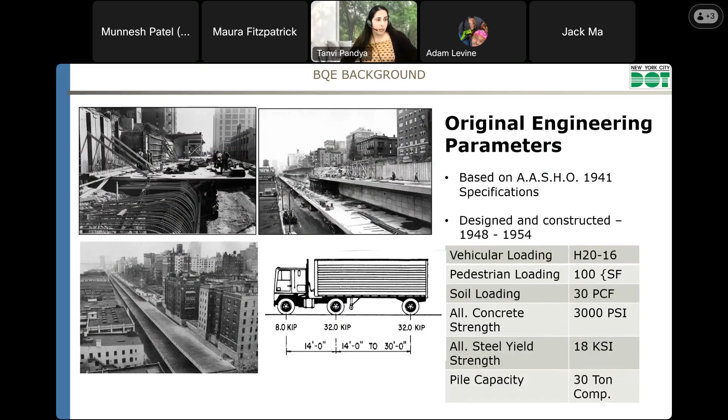We, the city DOT, took on this project in the 2013, 14 time frame. My personal involvement began in 2016 when I came to the city DOT to figure out what to do with this structure and where to take it into the future. And obviously, the first thing we wanted to do is really understand the condition of the structure.

So we did in-depth inspections, had load ratings done at the time. We did a lot of non-destructive testing to understand the condition of the structure. And that has kind of continued over the years, a variety of different tests occurring at different times. But typical engineering effort tends to be focused towards the capacity side of the equation, right?

So to understand how long a structure can be kept in service, there's two parameters. What is the demand on the structure and what is the capacity of the structure? And you always want the demand to be less than the capacity, right? So the capacity is a pretty typical analysis that we do quite frequently. On the demand side, though, information can often be a little bit dependent on code rather than reality, right?

So there are AASHTO codes that we follow that tell us what analysis to do and so on. AASHTO had done analysis of trucks at a certain point in time, and that told them what truck weights to use in design. But there's another assumption made in that equation, which is there is enforcement of truck weight limits happening on the roadways so that that assumed truck capacity is not being exceeded. But we don't know that.

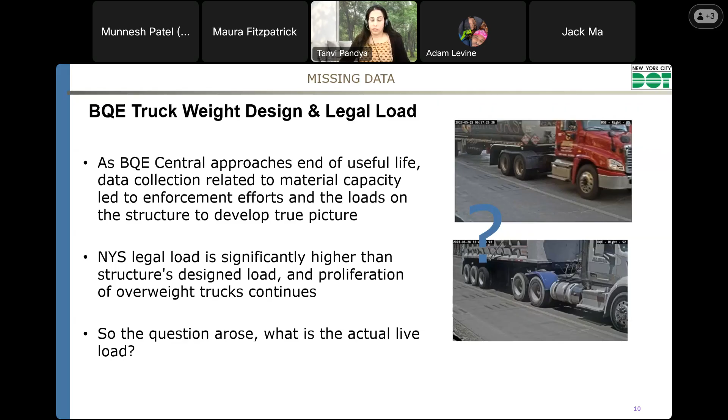We know from anecdotal information that the Northeast tends to have a lot of overweight vehicles. We also know that it's really, really difficult to enforce truck weights when you are on a very narrow roadway. So that led us to a question of what is the actual load on this structure? We cannot just assume that we are safe as long as we follow the codes. We wanted to be more proactive than that.

So during this time, we were working closely with C2SMART and Professor Hani Nassif in particular with the mayor's expert panel. And he had a grant to test various WIM sensors and analyze which sensors have a long service life and whatnot. So we created a test bed for him on the BQE so we could collect data on our site and get an understanding of the loads on our roadway. So all 6 lanes had sensors in it, and that was in 2019 that we installed this system.

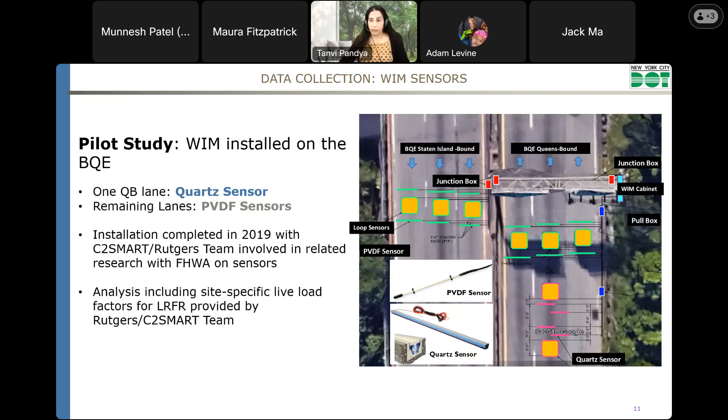What that told us was very much along the lines of what we anticipated, right? So there's 130,000 vehicles, and about 12 to 13,000 of those per day are trucks. Out of that, about 10 to 12% are overweight.

If you look at that bar of overweight and further look at how many of them are just a little bit overweight and how many are really overweight, this is the breakdown we were getting: about 40% were in that range of 80 to 85,000 pounds, which for structural purposes is not a big deal. That much safety factor we have. But then the remaining overweights, over 90,000, that's this gray, yellow range. We're talking about 20% of those overweights were severely overweight.

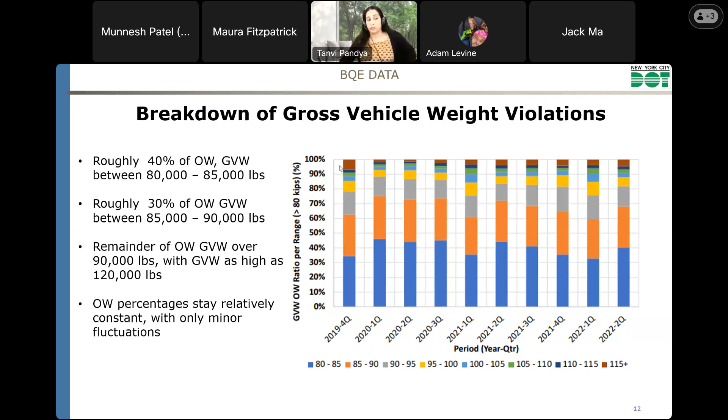That really piqued our attention. And the reason that matters is there's such a thing as load rating and load factors, right? So when we're trying to simplify this understanding of what is the capacity of the structure, how long can we continue to carry the current traffic, we do what's called a load rating. In that load rating, there have to be some factors of safety we apply to the capacity side as well as the demand side. So by code, that demand side is supposed to be 1.75 for inventory operating.

This kind of gets technical, but there are these factors. But the code also says that if you know the actual traffic conditions on your roadway, then you can take that into account and calculate what your site-specific load factor should be. So using the data that we had collected from that test bed, we had Professor Hani and his team calculate the site-specific load factors for us.

And in that site-specific load factor calculation, those extreme overweights really play a big role. And so because we had such a high number of high overweights, that changed our number. So we couldn't rely on a 1.75 number. We had to go to 2.13. That's over 20% increase that we had to account for in the Staten Island bound direction and over 30% for the Queens bound. That's a pretty significant difference.

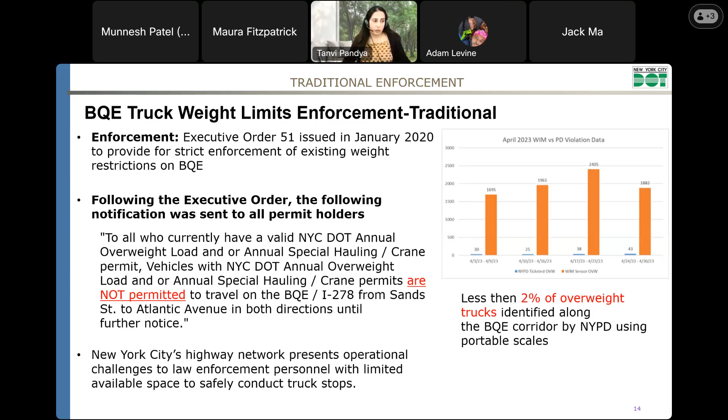But if you think about the roadway, it's 11-foot lanes, no shoulders. So they would have to take them off the roadway to a flat spot and then use portable scales. So even when we were proactively identifying overweight trucks for them, it would take them up to 2 hours to test one truck. So while the system was calling out these orange bars that you see, a much bigger number of overweights, PD was only able to handle a few trucks at a time. So logistics did not allow real enforcement to occur on this site. So that gave us additional impetus to make the case for direct enforcement using WIM.

By this point, obviously, the system had been out there for a while. We'd tested it over and over, so we had a sense of how the accuracy was staying over time and what band we're in with the error. So we felt somewhat comfortable saying that we can achieve this 10% number comfortably. At that point, again, we had a lot of attention from electeds at the time. So we were able to get legislative support to get this legislation done.

This is a first of its kind in the US, where we said we can use WIM to directly enforce the legal weight limits, if you are 10% over the limit based on your bridge formula, which admittedly has been a little bit difficult to get across to all of the freight industry, because trucks are used to that 80,000 pounds number, instead of recognizing that if you have a smaller truck, you don't get 80,000, you might get 54 or some other number, and then also the axle and tandem weight.

And the legislation requires us to have 2 independent weights taken. So we have 2 systems that measure each vehicle. That was passed in 2021, and then in '23 we made some minor adjustments to it. Once the legislation passed in 2021, by October 2022, we had finished the installation of the first system. This is just a graphic to show how the system is organized. We in the city already do automated camera-based enforcement, so we had pretty good background on that end of things.

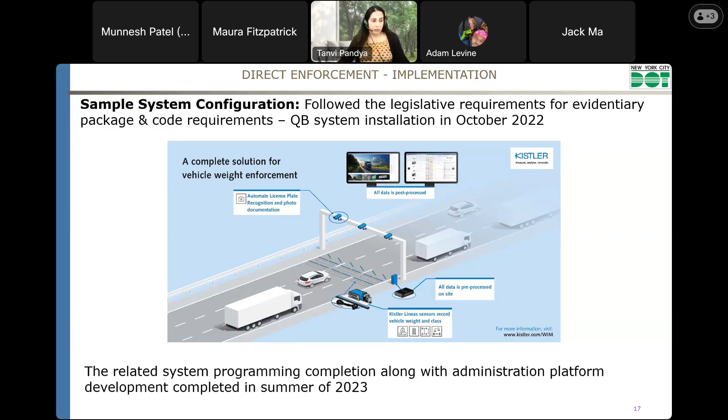So the WIM side had to come in. We had C2SMART supporting us in some of that effort as well. And then while the construction was going on, we had our back end being built out by our in-house IT so that we could actually identify the violations, do the reviews, and process it.

So why is this a big thing? Because if we were already doing camera-based and WIM has been around forever, what's the big deal? The big deal was tying all of this together, not just for enforcement. And while today's conversation is not doing the deep dive on it, we're also taking that information into truly monitoring the structure and understanding where we need to intervene in the long run, taking the material testing and all of that. So we have a paper on that. That's a whole separate topic.

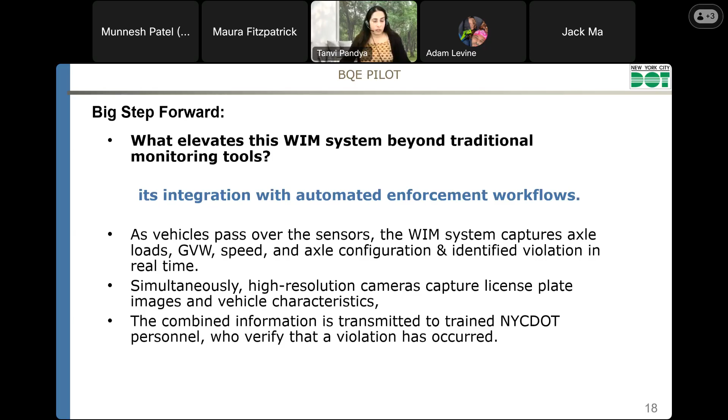But purely for the purposes of this conversation, the integration of WIM with the camera-based enforcement is a big change, right? So now you have 24/7 enforcement. We don't need so many personnel. It happens during the daytime. We get the packages uploaded of the violations overnight. Our team comes in next morning, reviews everything, and we're able to issue those violations, right? So this is much more streamlined and an ongoing process. This is a big movement forward in terms of enforcement for weights.

So in our particular case, obviously, we needed to make sure it is something that can handle the traffic. So again, those of you who know BQE, sometimes it's stop and go, sometimes people are flying. So we needed a system that can handle both of those. We also have to get the axle weights. We have to get 2 separate weights. And then the legislation requires that every 6 months, we need to get certified.

So any enforcement equipment that is used, whether it's the radar gun or the portable scales that the PD uses, all of those have to be certified for their accuracy, right? So if someone's giving you a violation, you want to make sure that that equipment can actually accurately measure whatever it is that it's measuring. So that is typically done by Department of Agriculture. They have inspectors that go test all of this equipment. And so we have to do that with them every 6 months, which led us to another

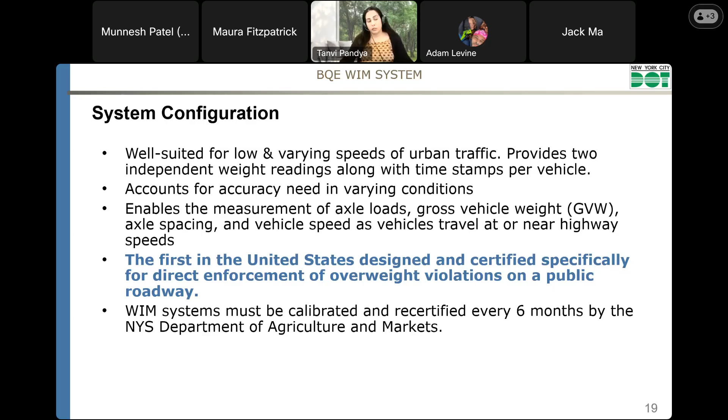detour, parallel tour of figuring out what are the requirements for these kinds of systems, what are the testing protocols, what should be the system capabilities, how should the testing occur, what are the logistics of doing the test, and so on. So in the US, the Department of Ag typically uses NIST Handbook 44. Every equipment that they test, the testing protocol is written in this Handbook 44. And for those of you who are working at agencies, at DOTs, or in policy, please pay attention because there's going to be an ask tied to this to you at the end of the conversation here today. So that's the handbook they rely on.

That currently does not address anything about direct enforcement using WIM. The other alternative is the ASTM. ASTM standards also do not refer to direct enforcement. The next out is the international code. So OIML, which is the European code, does have a pretty good detailed standard, but it's not directly applicable to US. So we began the effort to get the Handbook 44 updated as of 2022. And most of our standard is based off OIML, but done in a format that's more typical for NIST Handbook 44. And we've collaborated with a lot of people to try to keep that moving. But it's been a long push for that.

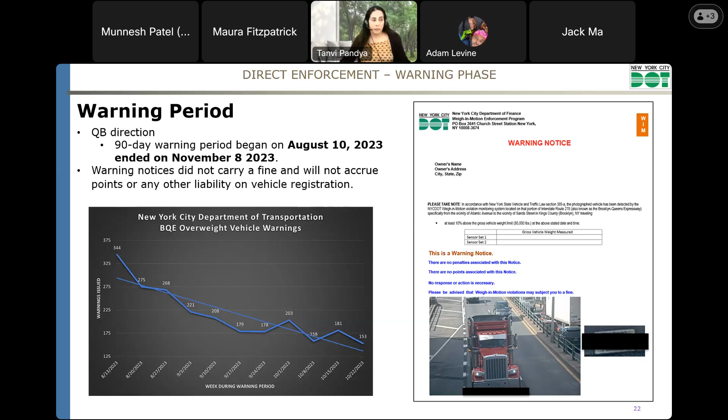The numbers dropped pretty quickly when people began to recognize that this is for real. And then at the end of those 90 days, within that time frame, we also got certified. So we had Department of Ag come down here. They observed all of the testing. And once they issued the certification and the 90 days were over, we went live.

During this time, we met with freight industry associations and whatnot and tried to educate them on how the system works. We worked with our Department of Finance and the adjudicating judges, so they understood our system and so on. And this is what the violation generally looks like. So in November 2023, it was Queens-bound that went live. And then this past summer, the Staten Island-bound system also went live.

So each vehicle can get up to 2 violations, one for gross vehicle and one for axle or tandem. So there could be up to 2 violations. Each one is $650. Each violation package gets reviewed by somebody at City DOT. They look to make sure that the pictures are clear, that the license plate is visible. If it's a drop axle type truck, was the axle up or down so that the axle count is not wrong, all those kinds of things. And certain other protocols. And once that is done, then the violation is issued.

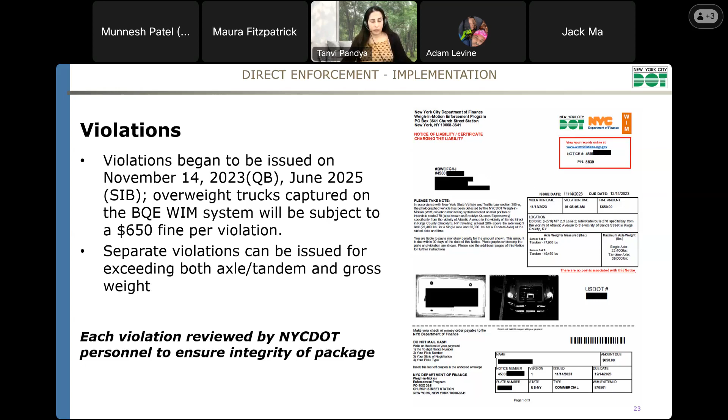And it has both weights provided so that it's clear why they got the violation and the type of violation they received. So it has a date and time, the license plate, the gross vehicle weight, what is allowed by bridge formula so that they know what was the number against which they were found to be overweight. We also take a tiny clip of the video as the vehicle passes over. So that clip is saved on a website that we provide a link to so that they can go view and confirm that it is their vehicle that traveled at that time.

And then similarly for the axle weight, it goes to the owner of the license plate. So whoever is the registered owner of the license plate, obviously, if it's a rental and all this other stuff, then the companies have their own protocols on how to handle that. And so the change in behavior was pretty obvious, pretty quick.

So since our system was live before we started issuing violations, you could see that the over 80,000 pound type vehicles were, on an average, this is daily, close to 150 to 200, depending on the time of the year, right? In the summer months, we typically get more overweights. Colder months, construction cools off, things seem to drop off a bit. And you could see the numbers were upwards of 175. And then as soon as we went live, it dropped to 60. So it came down pretty quick.

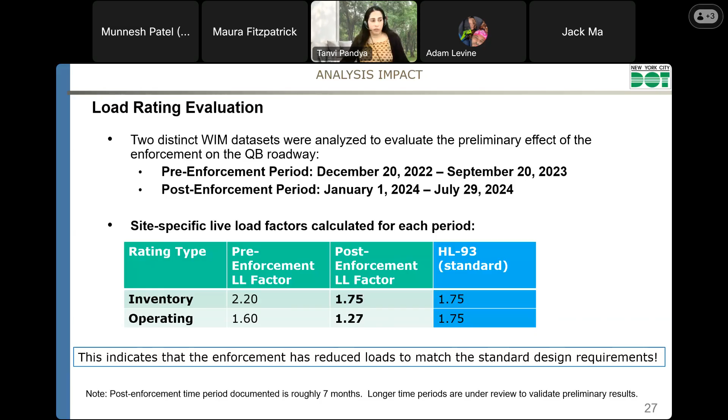So why all of this conversation matters is really that, and I think those of you who have heard me speak before will know that I am a proponent of being proactive as engineers and speaking up when we have things we could do that may not be strictly in our box that we think we should be playing in. Sometimes we have to look beyond.

And this was a case where we were asking for a legislative authority for something that hadn't been done in the US before, which meant we had to help write the legislation. We had to help come up with all of the protocols that went with it. We went to this NIST handbook. We're working with ASTM. We worked with the Commercial Vehicle Safety Alliance to get them on board with what we were talking about. We've been talking to freight and trucking industry. We've been explaining these things to elected officials.

And on top of that, trying to reach out to all of these other transportation agencies to make this mainstream, because we don't think that the demand part of the equation should be just left to policy or businesses or whatever, right? If we are responsible for the structures, then we need to have a role in that conversation and be clear about what are the limitations of the structure.

So that conversation has obviously been fruitful for this area. Since this year, we got an expansion of the authority. So there are additional agencies that are going to now implement WIM also. In addition to that, City DOT also got legislation to implement WIM at more sites. We continue to obviously work with freight industry to figure out how to make things work better for everyone. And we're working with FHWA and the industry and a lot of others to try to get this NIST handbook updated so that there is one standard across the country and not have a bunch of different standards.

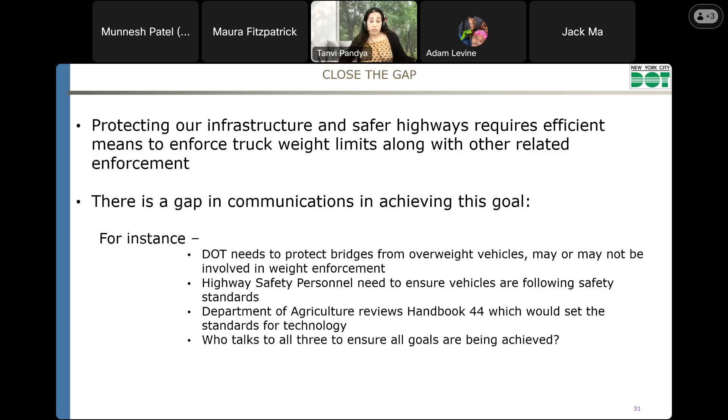So what I'm asking all of you is, please get in touch with your policymakers higher up the chain. Get us the support to get this standard. Now, your state, your region may or may not do this on a broad scale. You might have a single structure that needs some extra TLC, and maybe it's only there that you want to use it, whatever it is, or you just want the option for someday to do it. We need a standard that is national. And so we really need people who are paying attention to understand this. Feel free to reach out if you're from a state DOT or some other policy maker and we can give you more information, but we really need support to get this voted in. That's our main goal right now.

We also have started working on the ASTM standard to get that updated. And we want to have that broader conversation around this combined approach, right? It's not just about capacity. We cannot just keep looking at the structural condition. We need to look at demand, and we need to make this longer term investment and conversation. There's research to be done. There is all kinds of policy discussions to be had.

And one of the things that we have to remember is the codes, AASHTO and all of those, are done based on most common types of structures. So anytime you have a structure that is not as common, or some other condition around the structure that's not typical, then we need to be a little bit more careful in just assuming that whatever is okay by code, we must be okay. We have to have a risk-based and a reliability-based thinking in those areas.

So, this goes across the board, right? It's not just BQE. We have these kinds of corridors everywhere. We need to look at it more thoughtfully. We know these are regional mobility and major economic functions, so we have to be thoughtful about that. And weight limit is absolutely necessary for structural preservation.

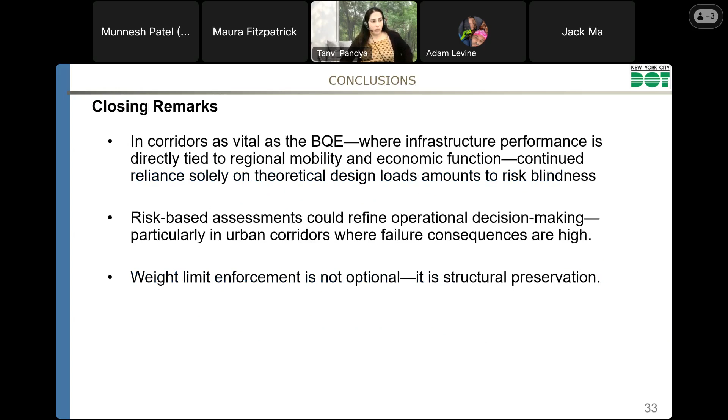So with that, thank you very much for all of your attention. Again, if you are in that policy DOT world, and New York, New Jersey is very supportive, but if you're from somewhere else, please reach out. We can hopefully get something figured out to get some more votes.

Thank you, Tanvi. That was great. I've got a few questions of my own, but I think we've got a few in the chat, so I'll ask Stephanie Brooks to see, do we have a few? Yes, we do.

I'll start out. Our first question that came in asked about the violations. Are these violations tied back to points on a license with the DMV, or, like the red light or speeding cameras, is the only enforcement a financial penalty? Currently, it is only a financial penalty. Can't say what it'll be in the future, but that's where it is right now.

Great. Sorry, that could be challenging, right? Because the truck is owned by a company, but the driver, who knows who the driver might be necessarily? It gets more difficult for that, I would imagine. Yeah, that's between the driver and the company, right?

Like when we drive city vehicles, if we get a ticket, it'll go to the city, but then there's a log that says I was the one driving, and if I got the ticket, then it's my ticket to pay. So the idea is we can only go to whoever owns the license plate, and then they have to figure out how to make sure that they, as a company, are in compliance. Right. Thanks. Sorry, Stephanie. No worries.